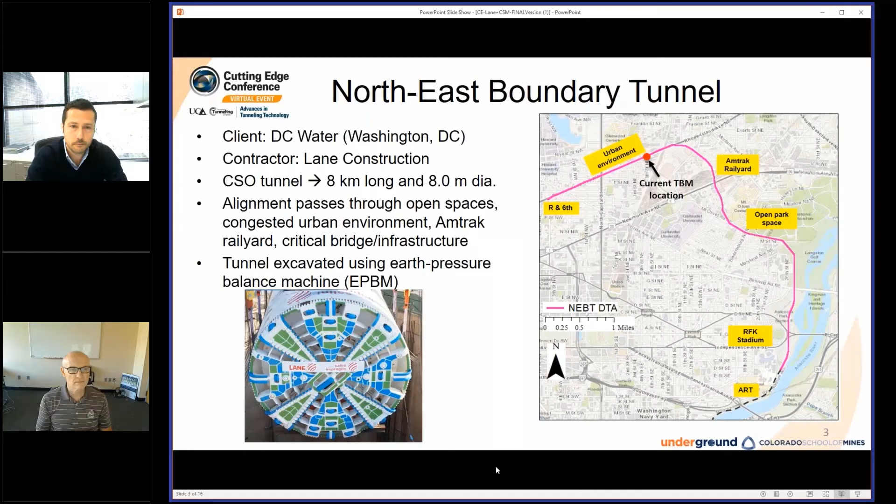Most of you are familiar with the Northeast Boundary Tunnel. The project is in Washington, D.C., and our client is DC Water Clean River. We are Lane Construction. We've been working with the Colorado School of Mines on the project of artificial intelligence applied to tunnel boring machines. And today we're going to talk about that.

This project is 8 kilometers long. You can see that the TBM currently is at 75% of its drive. We pass through some sensitive structures like Amtrak, CSX, WMATA, and other bridges, and it is an EPB machine and has been doing the excavation for approximately the last 15 months.

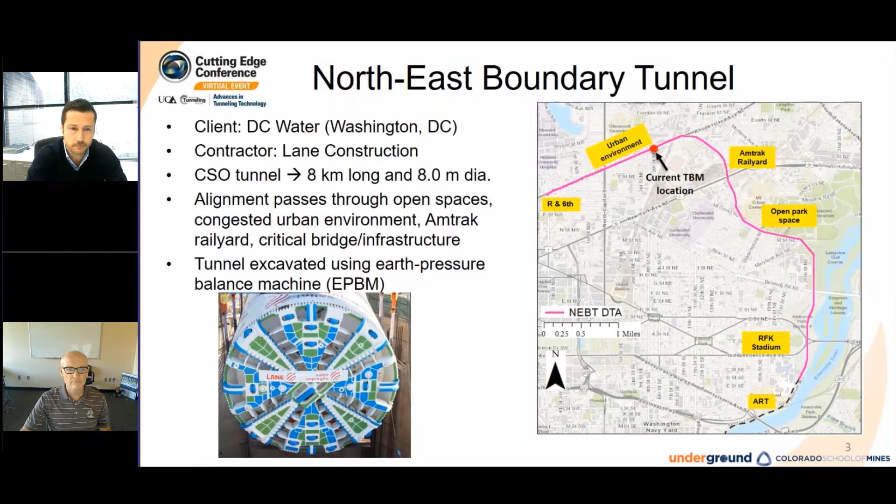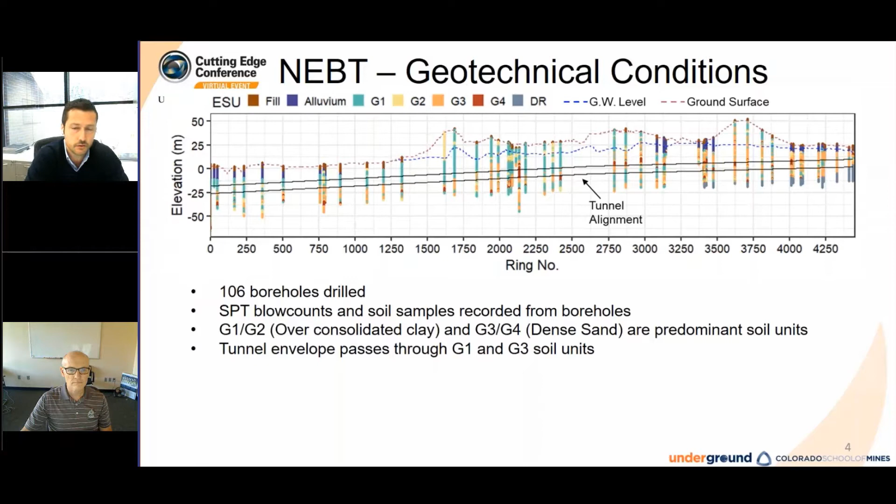Next slide, please. So the geotechnical condition of the alignment started with investigation pre-RFP, and the GBR was characterized by all these boreholes and the SPT blow counts and all the samples. But at the end of the day, we are simplifying things and saying that we are talking about two main soil groups: G1, G2, which we can represent as over-consolidated clay, and G3 and G4, which we simplify calling dense sand.

So most of the alignment, let's say 2/3 of it, is in those dense clays, and 1/3, which is what we are mining in right now, is the sand. The sand will be under pressurized water, we are encountering water, and therefore it's very important to apply pressure and to mine in a controlled way. Next slide.

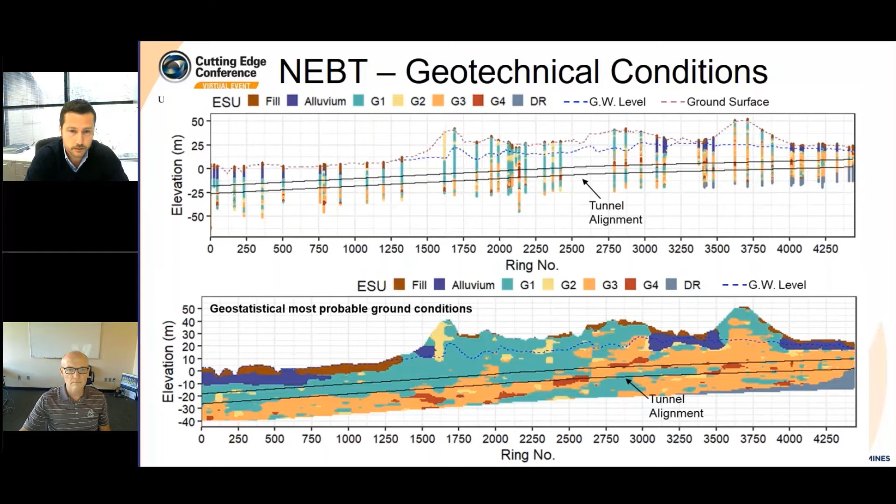So we started working with the Colorado School of Mines, and in our project of artificial intelligence, the first question that we asked ourselves is, what do we want to focus on? What are the bigger risks of the TBM that we want to model, control, and predict with this project? And the result of this discussion was, let's focus on the tool wear, because mechanical damage and potentially catastrophic damages on the TBM can be a very big issue.

So we want to have a model that is going to predict the tool wear and allow us to make a good decision where we need to do an intervention, when we have to anticipate an intervention or postpone an intervention if it's needed. At the end of the day, we want to avoid a bigger issue with a TBM stuck somewhere, or with a mechanical failure, or potentially having to have a rescue shaft in a place where we really don't want. So that is something that we want to avoid.

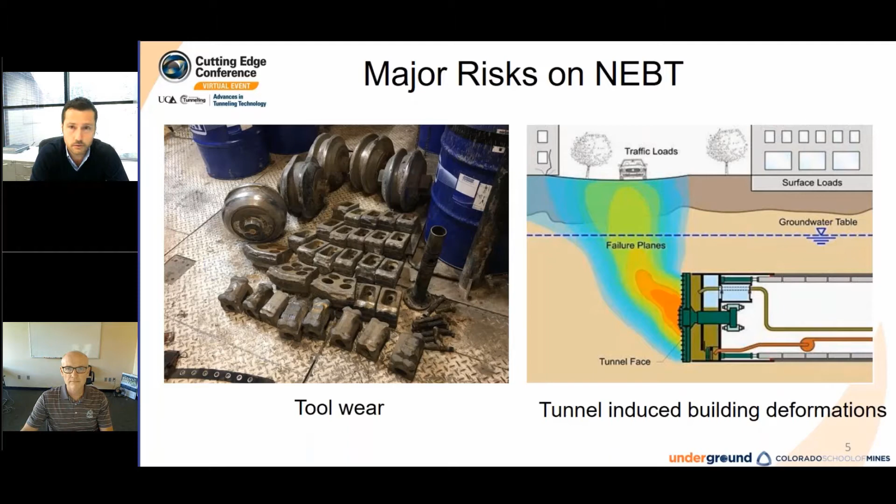And the second thing we're going to focus on is the settlement. Of course, creating settlement is something we don't want to do, and minimization of the settlement is one of the targets that we have here. So we're going to describe the model that we have implemented to try to predict that settlement. And with that, I'll turn it over to Mike, who is going to talk about these two items.

Thanks, Daniele. So we have applied AI successfully in tunneling. We applied this to the Seattle North Link Extension project in Seattle, of course, to detect and characterize the as-encountered ground by the TBM. As we all know, with EPB TBMs you cannot see the ground, and so you have to rely on looking at the muck to characterize the ground.

We felt the TBM could act as a probe drill and that its performance is impacted, of course, by the ground. So why not use that data to essentially treat it as a sensing TBM? So the way we did this was we trained an AI model using the TBM data and the borehole logs. The borehole logs exist prior to the excavation, and the TBM data is collected while excavating. So we train that model as we go, and then we predict the soil within the excavated envelope through which the tunnel boring machine moves.

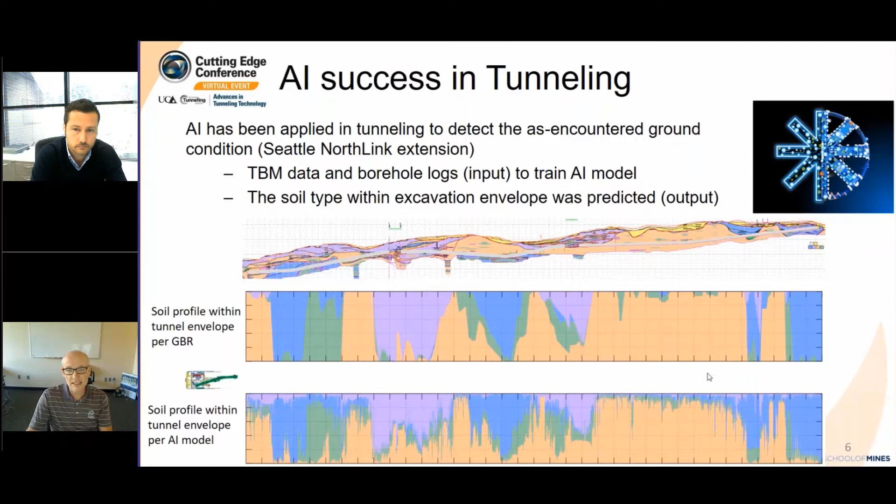So now if we turn our attention to tool wear, there's no continuous measurement of soft ground tool wear. There are disc cutter measurements, but that's a hard rock tool. There's none for rippers and scrapers. We simply don't have a technology yet that allows us to measure that. And as Daniele said, tool wear is quite critical. So we'd really like to get an estimate of what the rate of tool wear is.

So we only get measurements during these limited cutter head interventions, and cutter head interventions in soft ground, pressure balanced conditions in urban environments are a big expense and they're risky. And so they're very limited, and you try to avoid them if you don't have to do it.

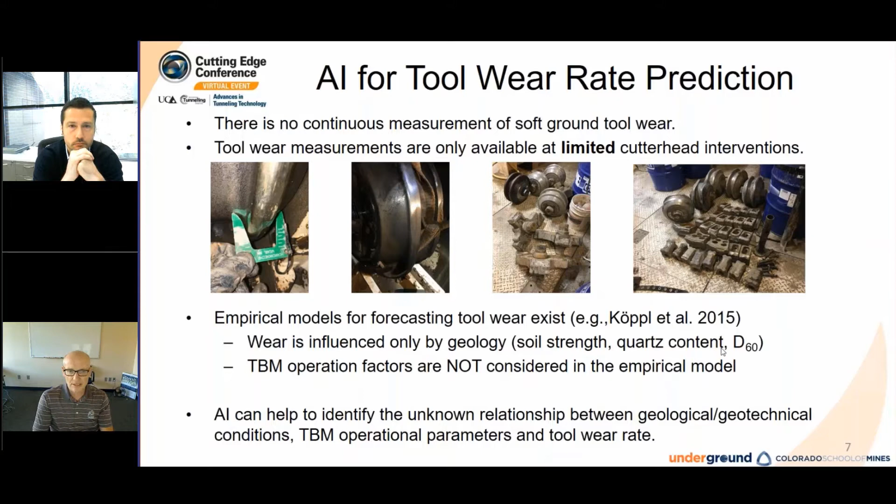There are empirical models for forecasting tool wear, but these models are predicting tool wear only based on geology, soil strength, quartz content, D60, which all leads to items like the soil abrasivity index. The TBM operating parameters are not considered in these prediction models. We believe they should be, but there's just lack of data to develop these models. So we felt that AI can help us identify these unknown relationships, specific to a project, between the geological and geotechnical conditions or parameters, the TBM operating parameters, and then the tool wear rate.

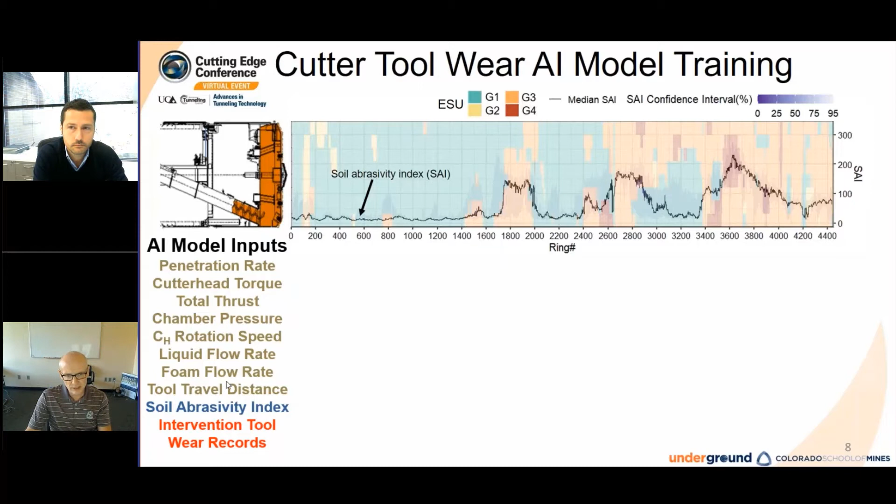So we take this now to train a model. We're going to use inputs from the TBM. So we use the penetration rate, the cutter head torque, the total thrust. These are parameters we believe have an influence on tool wear. And there's some other parameters shown there. We also take the soil abrasivity index and its variability, and we use intervention tool wear records to train the model.

So you see now in red, we have intervention tool records I1 through I7 as shown on here. Project is somewhere up here where my mouse is. And so you see that these are very sparse interventions, but for each one of these interventions, we have a record of observed wear. So on the bottom here, you see with a picture of the cutter head, the 8 ripper tools that are monitored. And then in the box here, you see the observed wear.

So for example, tool 1 is shown over here with 50% wear. That tool then gets replaced because it has 50% wear. And you see in this particular intervention number 7, all of the tools exhibited 50 to 60% wear and were replaced. And 50% wear, for point of reference, is about ½ inch or 12 millimeters of wear. So with this data, we trained the model.

I'm going to walk you through one example where we train the model over all the data up through intervention 6. That includes all the geotechnical data, soil abrasivity index, as measured TBM parameters, and intervention data. And then we're going to predict the tool wear beginning from after intervention 6 through intervention 7 and compare with the results.

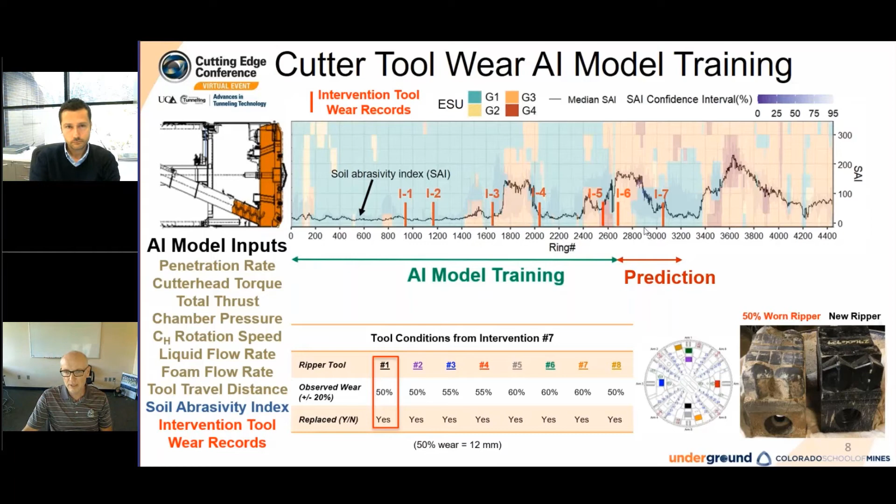So the model's being trained on a lot of fine grain data. There were some areas where it was experiencing coarse grained soil. We felt like maybe that would be captured adequately between I3 and I4, for example. But as it turns out, it wasn't sufficient enough. So that's one reason for the differentiation.

TBM parameters were also different, specifically higher thrust on the TBM, higher torque on the TBM between I6 and I7, and its influence on wear was not adequately being captured by the model because it hadn't encountered that ground. So one important lesson from these models is they're only as good as the data. They cannot predict outside the range of the data.

So it's really important that the model continues to get improved and updated, and that's the way we've set this up. So what we do then is we take this new data, we retrain or update the model, and then we predict the next set of wear. And so if you look here now, we see a prediction beginning just after intervention 7, and then moving for the next 400 or 500 rings.

And this is the new prediction incorporating the I7 data and the new TBM data. So this inherently is going to be more accurate. We don't yet have intervention 8 results to compare with this.

One note here is we do have lower variability and lower scatter in predictions, and that's directly attributed to lower variability in the SAI over this particular range.

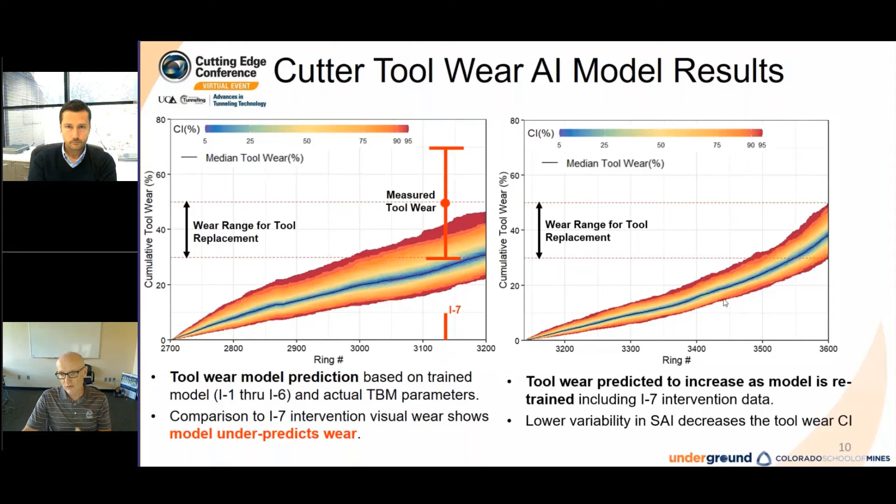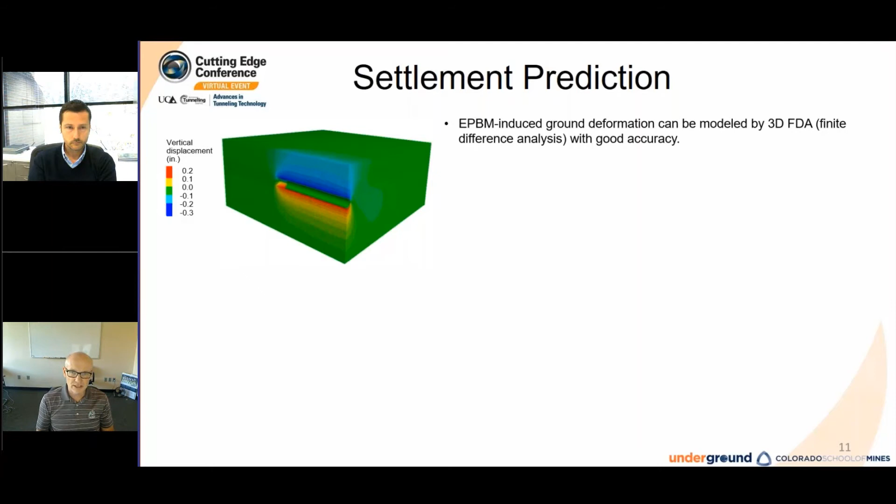All right, switching gears now to prediction of settlement. So the TBM-induced ground deformation can be modeled by three-dimensional computational modeling, finite element or finite difference analysis, with good accuracy. So here, you see a simulation of this step-by-step modeling of deformation. We actually introduce into the computational modeling the TBM parameters. So there are face pressures, there are grout pressures that are specified along stretches of the project. Those are critically important to predicting the correct greenfield deformation, so we input those.

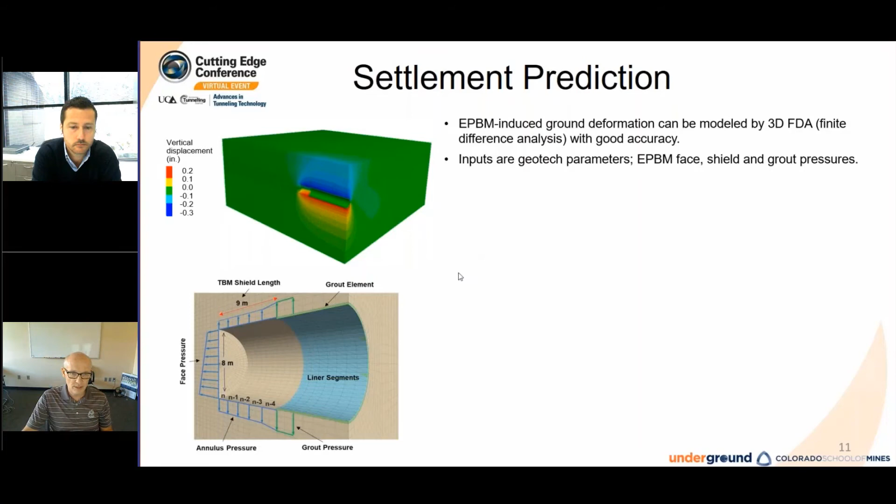And we found on the project that we have matched the observed greenfield surface displacement profiles quite well using this computational model. So here you see a lot of great instrumentation and data points for greenfield ground deformation. And if you look over here on the right, you see the measured surface settlements and predicted surface settlements line up pretty well on a one-to-one line, which tells us we're modeling accurately using this 3D model.

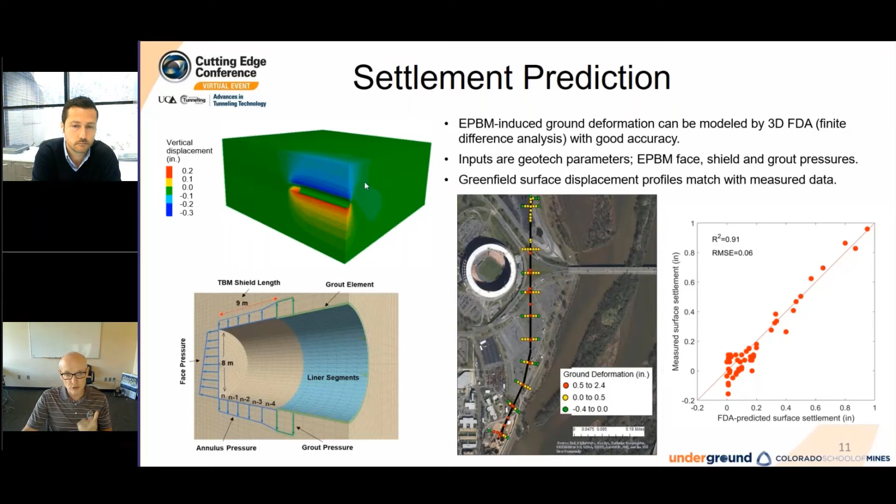But here's the problem. 3D modeling is complicated and computationally expensive. It takes 2 hours for a single run. So this makes the process of predicting ahead or predicting in real time using construction timescales difficult. The whole point of this is to use this as a risk mitigation tool, to be able to predict the next ring, to predict the next shift. And so we need something quicker.

So the strategy here was let's train an AI settlement prediction model using all of the simulations. And if the simulations are accurate based on our ground truthing with actual data, then we could feel confident in our AI model. So we trained the AI model using hundreds of simulations, varying geology that we anticipated on the project from the data, varying geotechnical parameters, and varying TBM parameters, specifically face pressure and grout pressure. So we have lots of input. In fact, we have 16 input variables into 800 of these simulations.

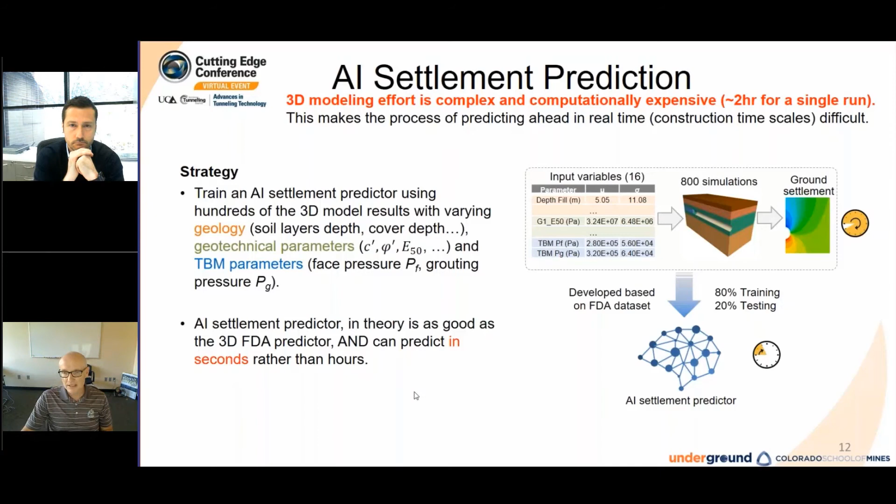We ran these on weekends, we ran these at nights, lots of grad students, lots of processors on computers, but completely off of the critical path of the tunnel project. So it just churns away and produces all of the ground settlement data we need to then train this AI prediction model. So in theory, the settlement predictor is as good as the computational model, and it can predict in seconds. Now we've got a tool that, if given inputs, can predict what the settlement will be in seconds instead of hours. So the AI model shows similar capability as the computational model in successfully predicting ground settlement.

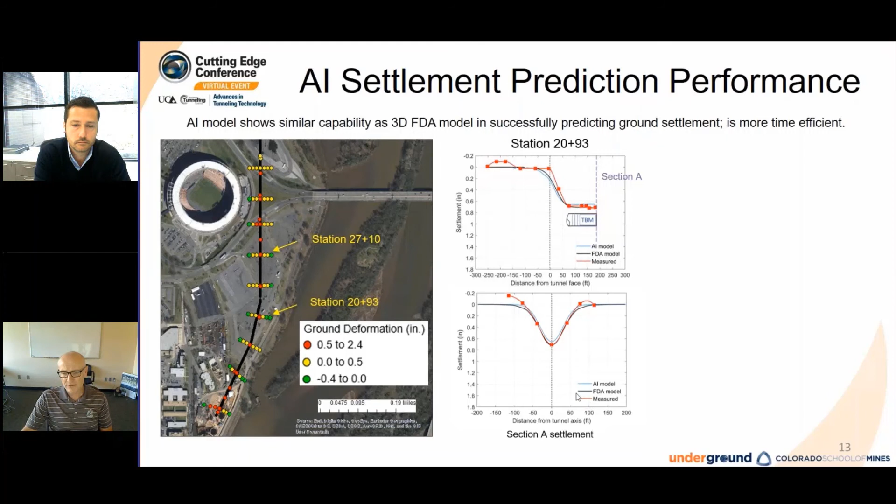Here's a good example where we've got a longitudinal displacement profile at this station 20 plus 93. And you can see here the red dots are the observed measurements, about 0.7 inches of maximum settlement. And then if we look at a transverse profile at section A there, you see that the AI model matches the FDA model, the finite difference model, and as well the measured results. And then there's another station just here, 27 plus 10, where we see a similar successful level of modeling.

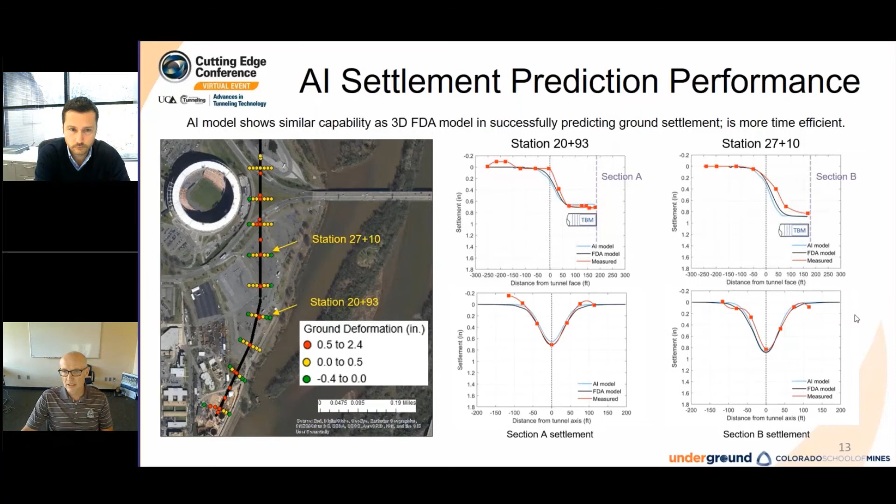So now we've got a settlement prediction tool, and we're going to apply this for the rest of the project, always continually training this. So what you see here is about 4,000 feet, 5,000 feet of tunneling through urban environment, as shown on the top Google Earth type picture. And then every 1,000 feet or so, we make a prediction as shown in this graph. So as an example, at station 230, we see a prediction of what the maximum settlement will be.

Again, there's variability in these estimates because the ground conditions are variable and we don't have certainty in what they are. And the TBM parameters are variable too, and there could be operator error. We want to capture potential operator error. So what this shows is the max settlement can vary. With 95% confidence, we can say the max settlement will not exceed 1/2 of an inch. So that's good information to have. We can't say if it's going to be 0 versus 1/2 an inch, but we can say with 95% confidence it's going to be at most 0.5 inches.

So finally, though, limitations with this approach: these are greenfield ground deformations. These are not structural deformations.

So we have lots of training data on greenfield conditions. In order to develop an AI type model for structures, you need lots of different types of structural deformation, different types of structures and data. So that's much more challenging. However, we all understand that buildings are, for the most part, stiffer than the ground, and so deformations of the buildings will be less than the greenfield. So there's still a lot of value in that.

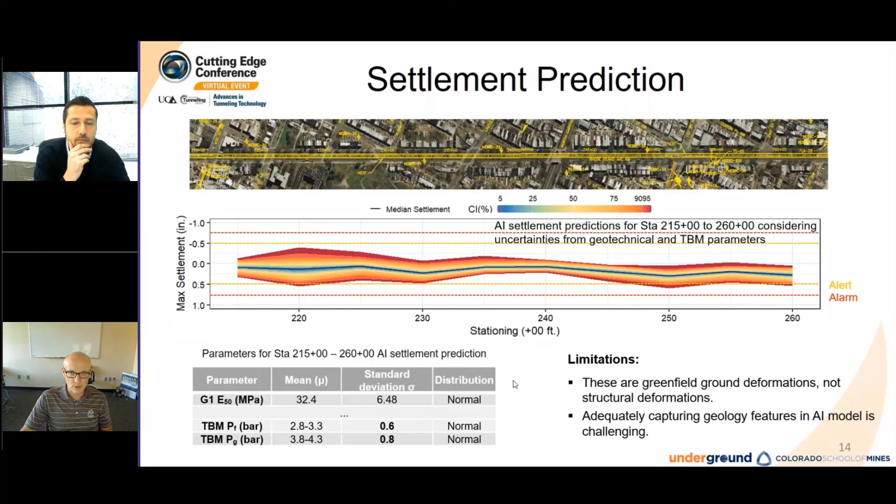Secondly, one of the challenges is adequately capturing the geological features in an AI model. And so this certainly is a work in progress. And as we move forward in our study on the NEBT project, as we get new data, we'll be able to update our model predictions here. So with that, I'll turn it back to Daniele for some final thoughts.

Thank you, Mike. So some conclusion and final thoughts. Obviously, for us, having been the contractor in Anacostia, which was the previous project for DC Water, was important because we had a lot of material, a lot of data, and the more you know, the better is the model you create. So that was one of the reasons why we involved also Colorado School of Mines, and we got focused on the NEBT.

We decided, like we discussed before, to focus on tool wear and settlement because they are related to the highest risk on the TBM in the urban area. And I think we got good results. So right now, one of the challenges that we had, as Mike described before, is the availability and the quality of the data to be able to train the model. So one of the things I see in the future becoming important is having some sensors, some means and methods, some ways of capturing more information to be able to better train those models.

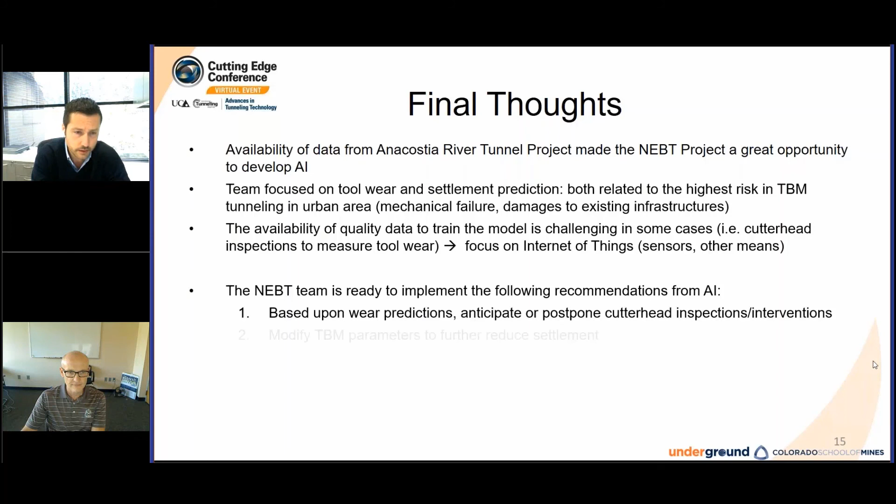So as I said, overall, we are very happy. I think we got good results, and now we are ready to go to the next phase where we can actually make decisions based on the recommendation that we got from this model. And I think we can focus on trying to anticipate or postpone interventions and improve our quality and our productivity as well. The second part, which is related to the settlement, we can look at the consideration and the suggestions from AI and decide if we want to change some parameters to even further reduce our settlement.

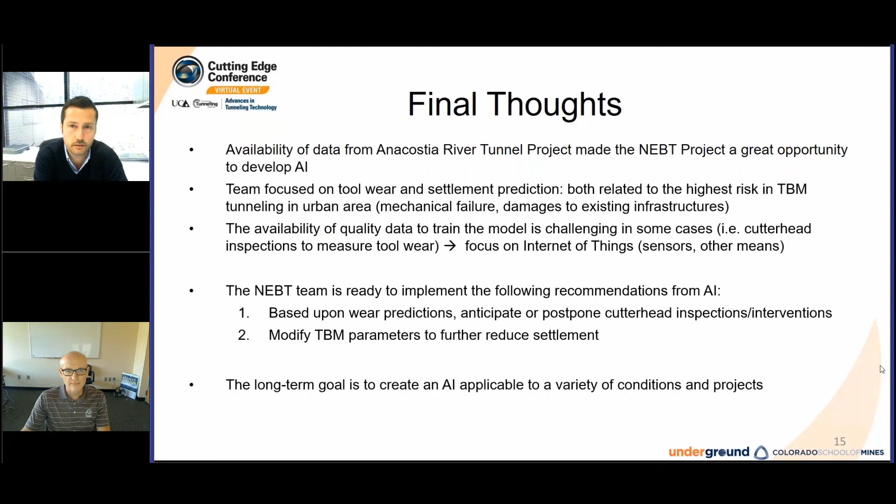As of now, the machine is proceeding with very little settlement. There will be a presentation during this conference with a colleague of ours that is going to describe a little bit. But generally speaking, we are pretty happy. And in conclusion, I want to say that it's not only about predicting and focusing on one project. The importance of creating this model is also related to capturing some of the data that in the future we'll be able to train more and more models and make them more universal, more applicable to different contexts as well. So with that, I conclude, and thank you for your attention.